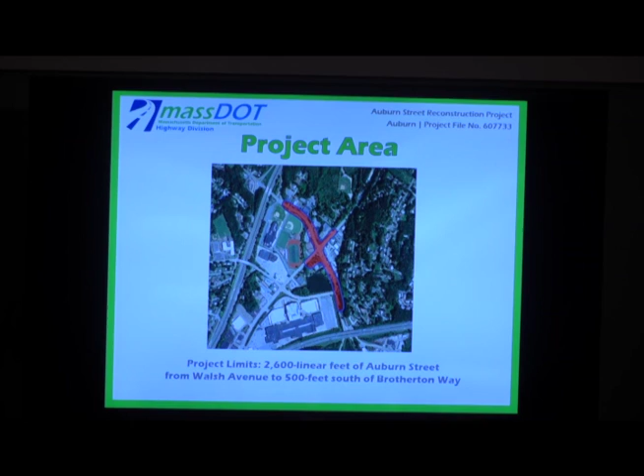Why do we need this project? Along the project corridor, we have some poor sidewalk continuity, missing wheelchair ramps. Along the entire corridor, we found there's a lack of distinction between the roadway, parking lots, sidewalks, kind of all blend together in a lot of places between the parking lots and the sidewalk.

There's really no existing bicycle accommodations throughout the project or throughout the corridor under existing conditions. The pavement conditions have varied from, obviously you need to repair, and then we have failing trench patches and stuff like that along the corridor.

And then there was also some safety concerns at this intersection of Route 12 and Auburn Street. A road safety audit was conducted with the police department, fire department, the state at that intersection. And those recommendations have been incorporated into this design.

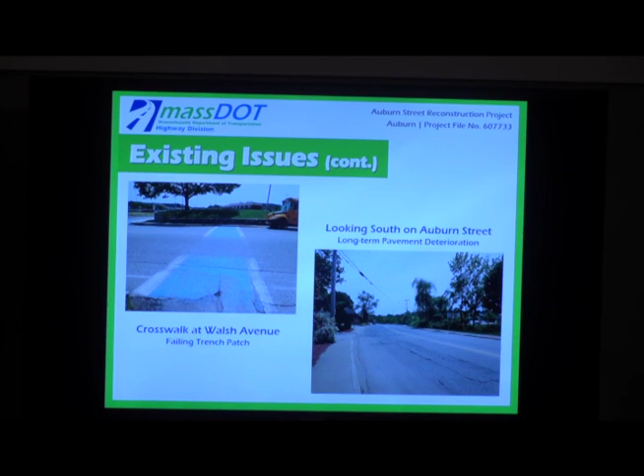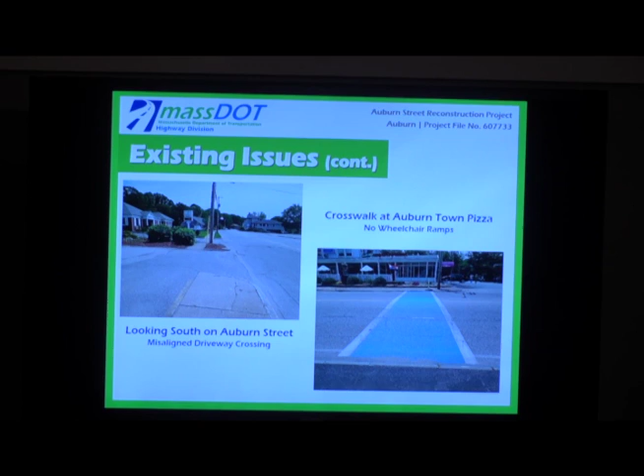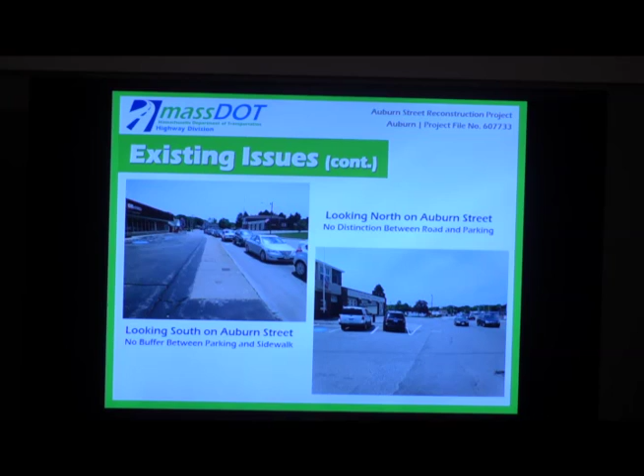So, project goals, we're looking to kind of address a lot of these issues. We're looking to upgrade the existing traffic signal equipment at Brotherton Way, adding pedestrian signals at the Southbridge Street intersection.

Improve bicycle accommodations by providing bicycle accommodating shoulders, bike lanes on both sides of the roadway. So these are 5-foot shoulders. New concrete sidewalks with ADA compliant crosswalks, ramps.

We're going to upgrade the existing drainage system. We're not planning on replacing it, but we're going to replace the existing catch basins with deep sump catch basins to improve stormwater quality where possible.

Improve the pavement through a combination of options. We're looking to mill and overlay from Walsh Ave to Southbridge Street, and then do a full depth reconstruction or reclamation from Southbridge Street past Brotherton Way.

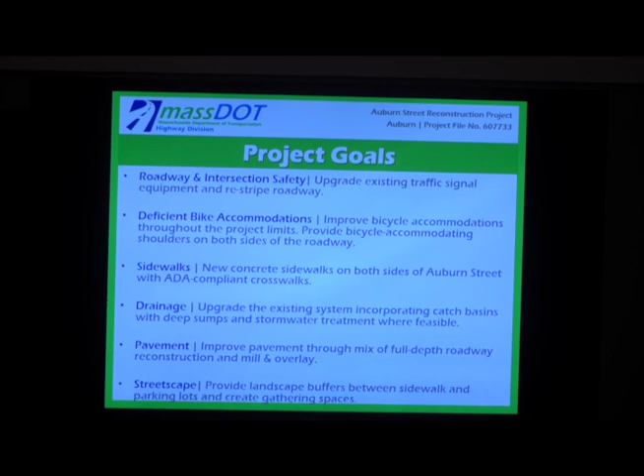And then finally, streetscape. We're looking to incorporate a couple of pocket parks, a larger area next to the fire station with landscaping. We're looking to try and break up some of the existing continuous pavement between the roadway, parking lots, sidewalks. So we're trying to provide buffers for pedestrians and for the parking lots.

We're not proposing any. We're evaluating the bridge. Originally, it was not part of the project, but we're evaluating possible changes to the guardrail and such on the bridge.

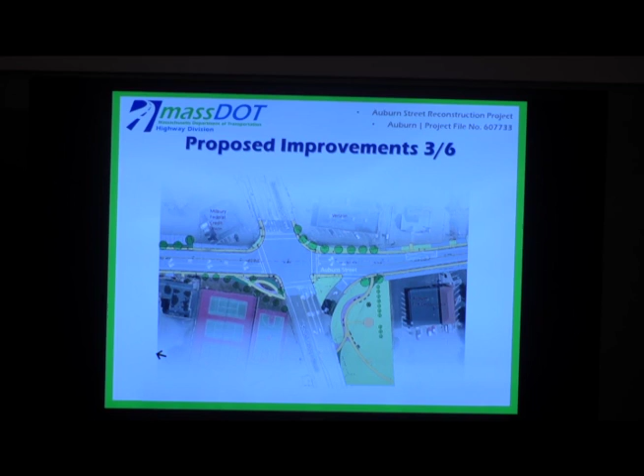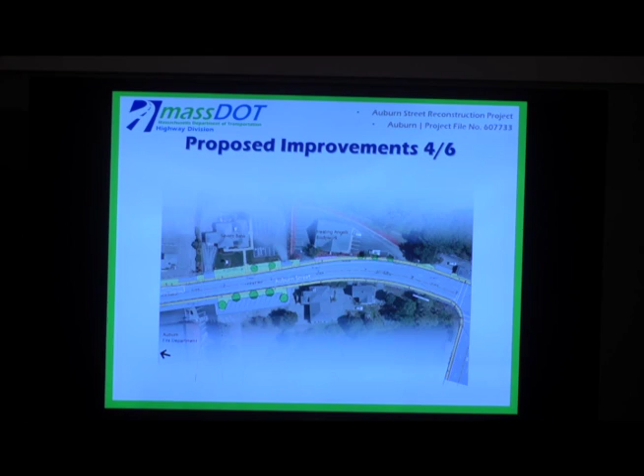Again, carrying down some additional streetscape landscape buffer between the parking lot that's adjacent to the fire station. The three-lane cross section goes away, so we're down to two lanes. That gets carried down into Brotherton Way, where we do a new traffic signal, again with crosswalks on each approach. Left turn lane, as is now going into Brotherton Way, two lanes exiting Brotherton.

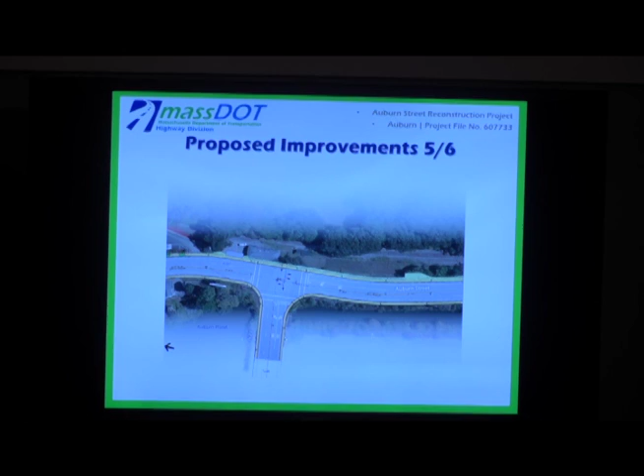And then this gets carried down, again, approximately 500 feet past Brotherton Way to where we meet the existing roadway. That's pretty much the extent of the roadway improvements.

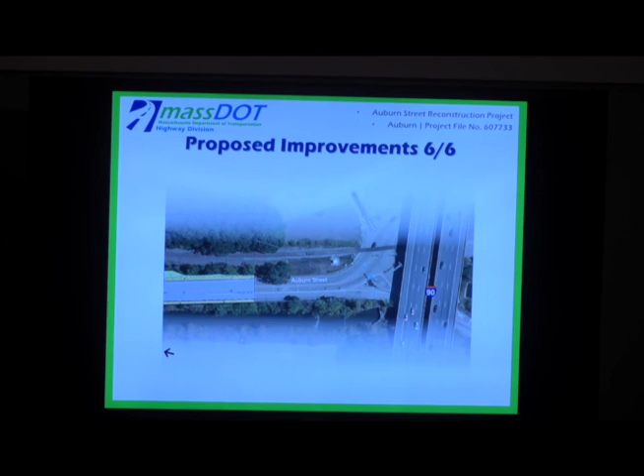I'm going to turn it over to Steve, our office, to go over some of the streetscape betterments that we're looking at.

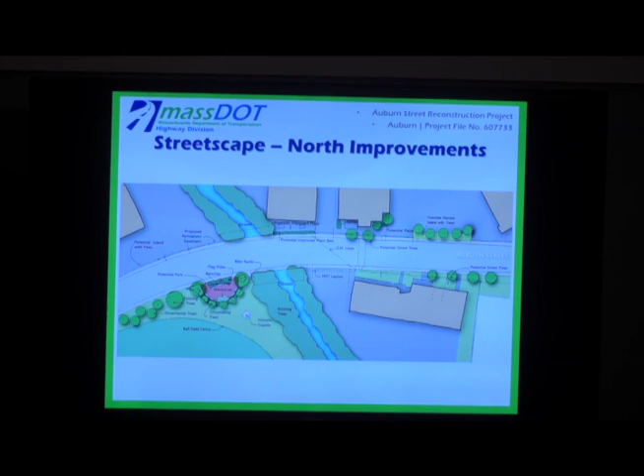Can you, let's just advance?

Hi, I'm Steve Dadarian, landscape architect on the project, and as Greg mentioned, we're introducing some pretty significant landscape improvements all along the corridor, including a pocket park adjacent to the ball field.

There's the existing historic cupola in that same vicinity, simply taking advantage of that space. And as Greg mentioned, as you proceed further down Auburn Street, we're introducing islands by the parking lots, simply to break up what seems like an endless expanse of bituminous in some of these locations.

Further down, as you approach Southbridge Street, adjacent to the basketball court and the tennis courts, we're introducing a small park area. Currently there's simply a walkway through there with guardrail along the edge, and you really can't see down into that area. We'll be going to crash-rated bollards along the edge so that you do have views in.

Introducing a small park area with benches, both looking out and towards the tennis courts. Perennials, ornamental grasses, and shrubs woven through that area simply to highlight it. And trees along the sides laid out in such a way that it still preserves views towards the tennis courts. We're open to ideas as far as type of trees and size of trees, et cetera, on that.

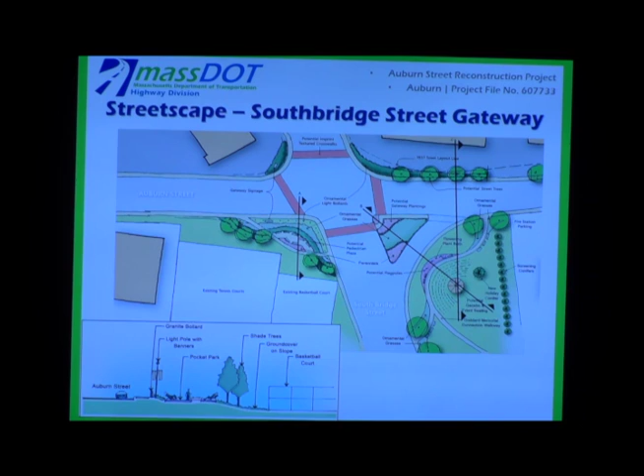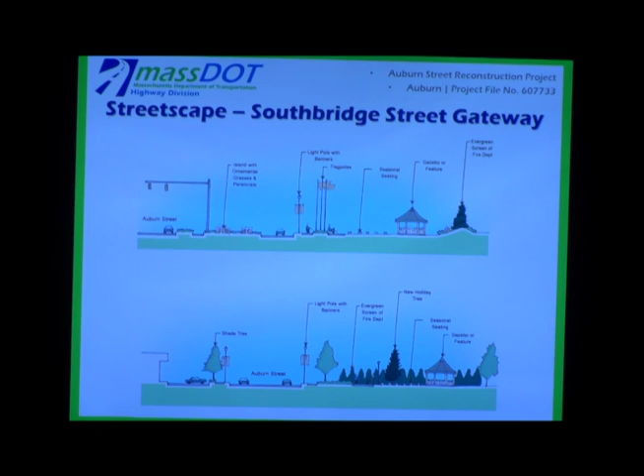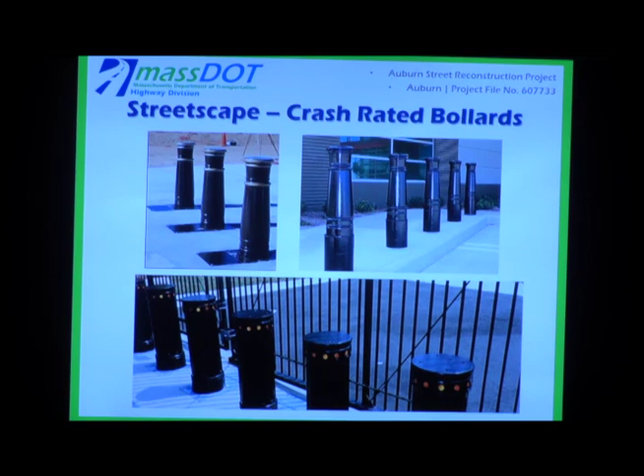Okay, some gazebo ideas. These are the crash-rated bollards. Different ideas as far as street lighting, designed to have banner arms that can be used throughout the year. You could change out the banners for different seasons, and also some hanging flower pots would be suggested in key locations.

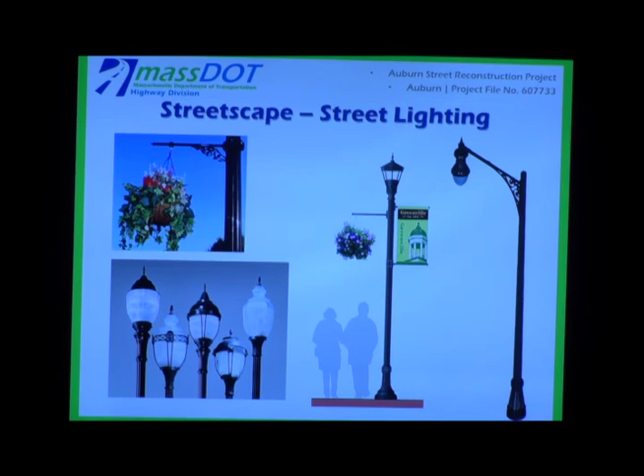All lighting would be LED, high efficiency. As far as tree plantings, just a nice palette of trees. For screening, very high durability plants such as upright juniper, arborvitae, and in some key locations blue spruce, which becomes a larger tree. As street tree plantings: pin oaks, green pillar pin oaks which are very upright for tight locations, red oak and black tupelo. At the bottom are more ornamental trees introduced along the corridor with flowering effect and fall foliage. The idea is not to create a monoculture down the corridor, but to have a variety of tree species so nothing is prone to disease wiping out a lot of trees.

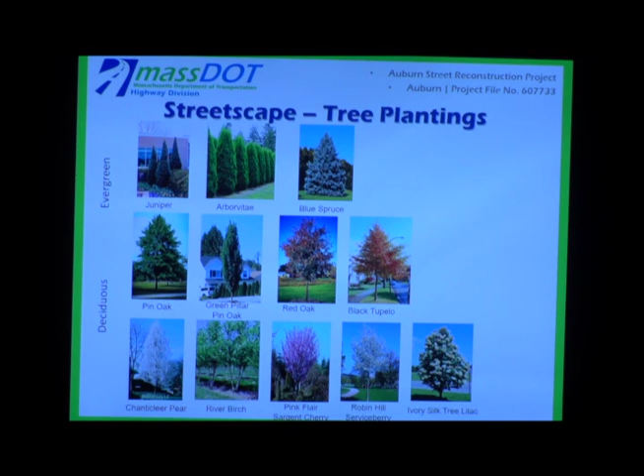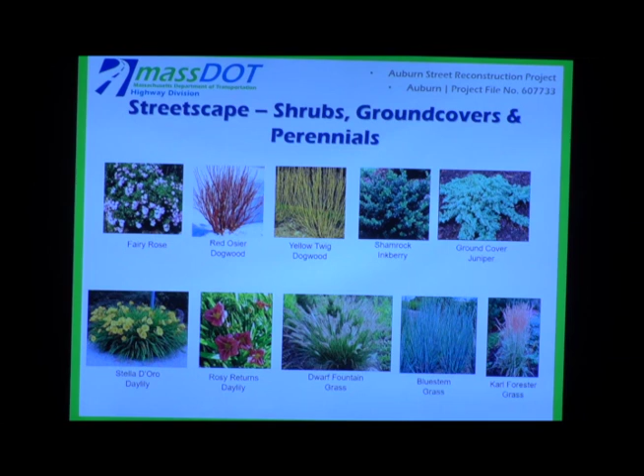So just to carry along the project schedule, kind of where we've been and where we're going. We submitted the 25% design back in April of 2018, about a little over a year ago. We are here today having the design public hearing, and our next step is advancing to final design. We have the 75% design submission expected in the early fall, followed by a review period with DOT. Then we'll move on to 100% and PS&E design, with the intent of final engineering being completed around this time next year, and then carrying on with construction.

The project is expected to be advertised at the moment in fall of 2020 - December 12th, 2020, that's exactly when it's going to happen. And then construction would be expected to start in the spring of 2021.

So, moving on - how will traffic be affected? Obviously during construction there'll be some delays. We're expecting this project to take less than 2 full construction seasons - I'd expect most to be accomplished within one construction season, leaking over into the spring or early summer of the following season. That can always change depending on when things get started. During working hours, we'd expect lane shifts and lane closures with some alternating traffic. One benefit this corridor has is it's very wide, so until the curb is set there should be adequate space to maneuver traffic around and work in the road.

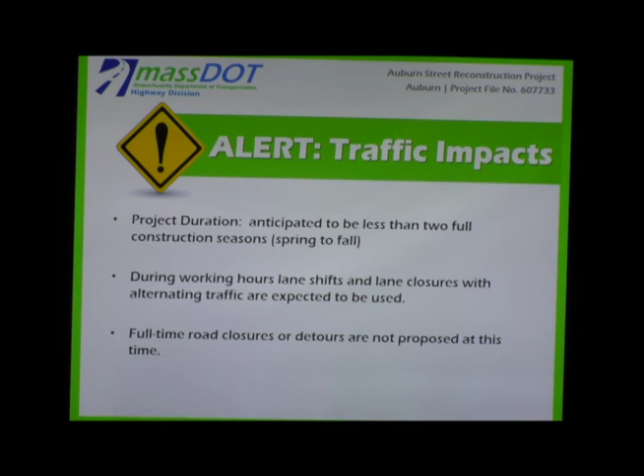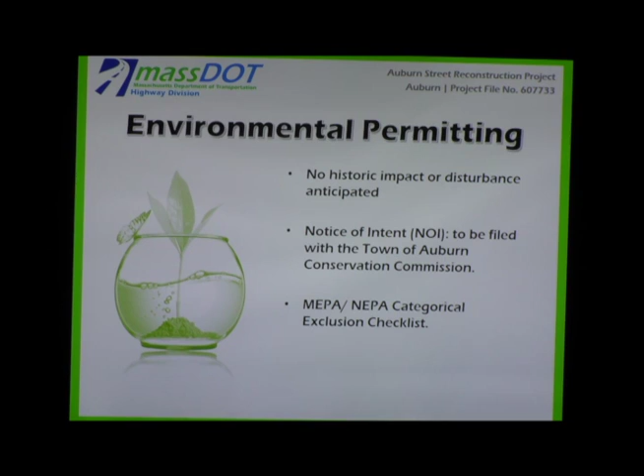Environmental permitting - we're not anticipating any historic disturbance. A notice of intent will be filed with the town's Conservation Commission for work being done in the buffer zone in the riverfront area, and then we have to complete MEPA and NEPA categorical exclusion checklists.

Next steps - as Tom mentioned, these proceedings are being recorded, so we'll go back and review any comments received from this meeting, and where feasible those will be incorporated into the project. Then we'll be advancing the plans to the 75%, 100%. And again, the funding is available through the state TIP for fiscal year 2021, which starts in October of 2020.